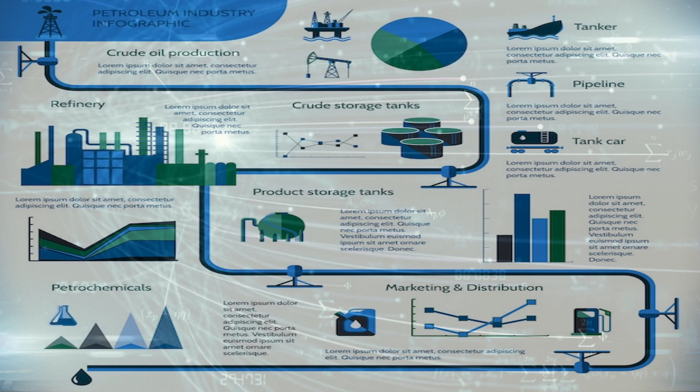The image shows the chain of petroleum products. This video discusses use cases of the Kalman filter at the top of the chain, crude oil and gas production.

Rudolf, Rudy, Emil Kalman was a Hungarian-born American electrical engineer, mathematician, and inventor. Rudolf Kalman was born in Budapest in 1930. After emigrating to the United States in 1943, he earned his bachelor's degree in 1953 and his master's degree in 1954, both from the Massachusetts Institute of Technology. Kalman completed his doctorate in 1957 at Columbia University in New York City.

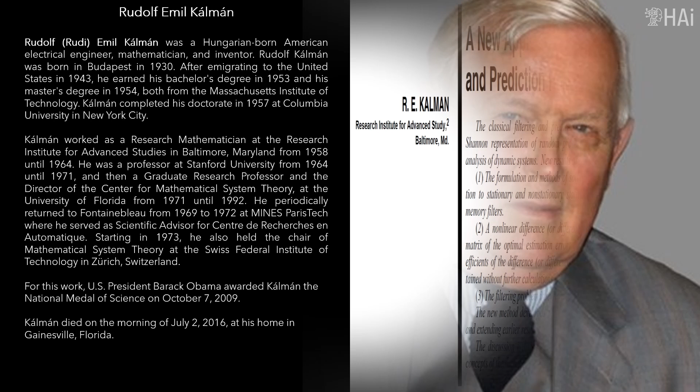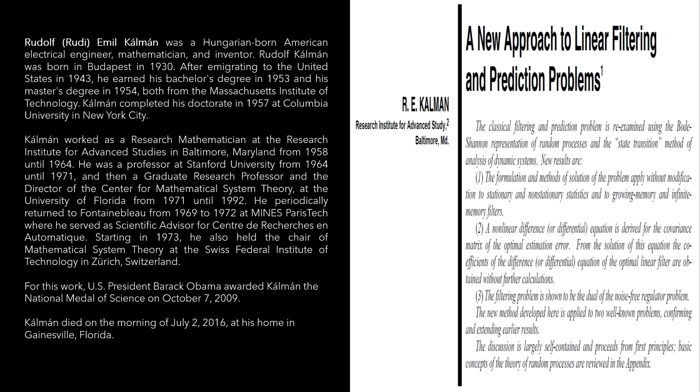Kalman was most noted for his co-invention and development of the Kalman filter, a mathematical algorithm that is widely used in signal processing, control systems, and guidance, navigation and control. For this work, U.S. President Barack Obama awarded Kalman the National Medal of Science on October 7, 2009.

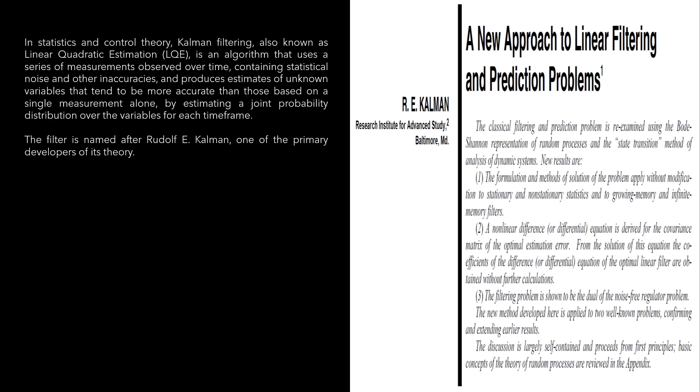In statistics and control theory, Kalman filtering, also known as linear quadratic estimation, is an algorithm that uses a series of measurements observed over time, containing statistical noise and other inaccuracies, and produces estimates of unknown variables that tend to be more accurate than those based on a single measurement alone, by estimating a joint probability distribution over the variables for each time frame.

Kalman filter applications in oil and gas production. Case: oil gas lifted wells. This section is based on the paper State Estimation of Gas Lifted Oil Well Using Nonlinear Filters.

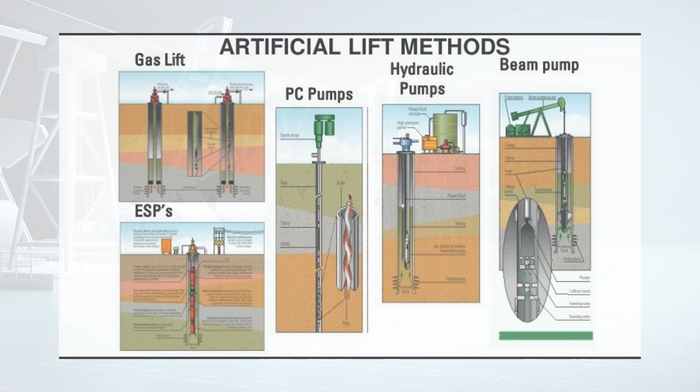The artificial lift methods are beam pump, hydraulic pump, PC pump, gas lift, and ESPs. Gas-lifted systems are usually situated in harsh environments, or deep below the sea surface, making it difficult for sensors to produce reliable measurements. This is due to the difficulty encountered when deploying the sensors in the location required to provide good measurement, excess heat effect on the sensors, and reaction between the sensors and the harsh environments, among other reasons.

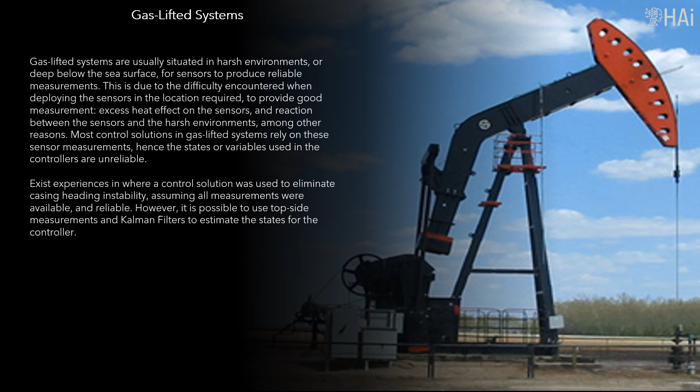Most control solutions in gas-lifted systems rely on these sensor measurements, hence the states or variables used in the controllers are unreliable. There exist experiences where a control solution was used to eliminate casing heading instability, assuming all measurements were available and reliable. However, it is possible to use topside measurements and the Kalman filter to estimate the states for the controller. The performance of the state estimation methodologies on gas-lifted systems varies, due to the dependence of the model on the underlying assumptions used at the modeling stage, in addition to the noise probabilistic hypothesis.

In the linear case, the Kalman filter is the optimal estimation method. But a gas-lifted system is inherently nonlinear, and nonlinear filters such as the extended Kalman filter (EKF), unscented Kalman filter (UKF), or particle filter (PF), among other nonlinear state estimation methods, should be used. The article presents the application of EKF, UKF, and PF to gas-lifted systems, and examines their performance by analyzing the residuals and performing hypothesis tests on the residuals.

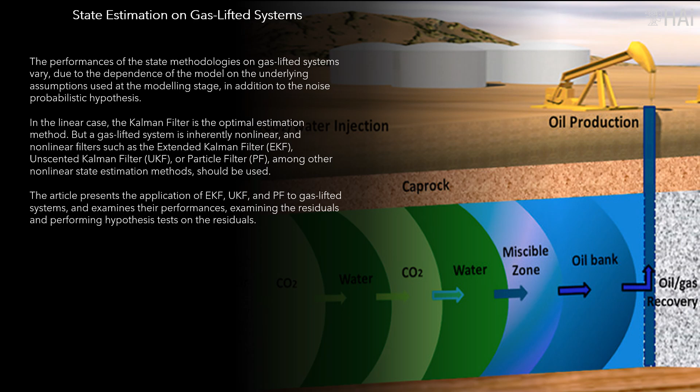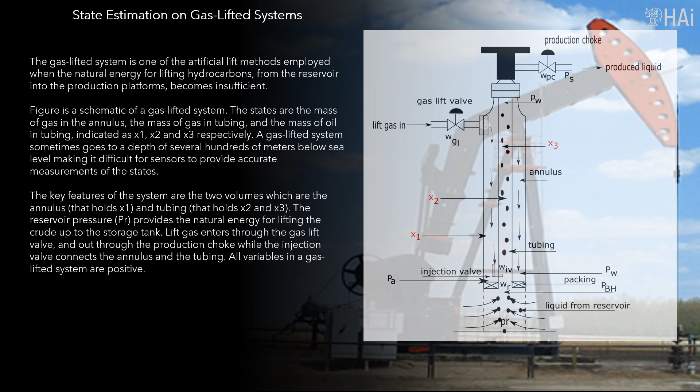The gas-lifted system is one of the artificial lift methods employed when the natural energy for lifting hydrocarbons from the reservoir into the production platforms becomes insufficient. The input is the percentage valve opening, which controls the flow rate of produced fluid through the production choke. In other cases, the flow rate of lift gas into the annulus is also considered as input, but here the authors fix it with a regulatory controller.

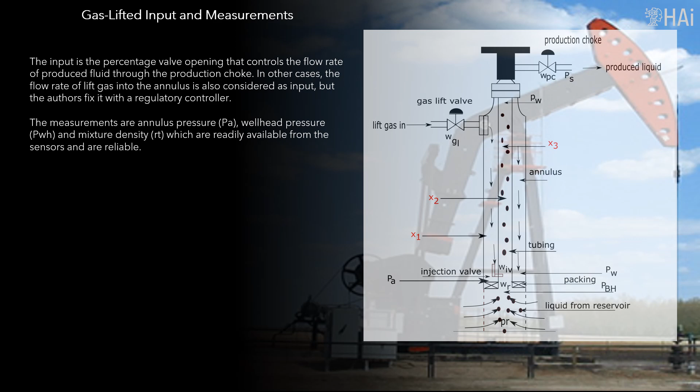The measurements are annulus pressure (PA), wellhead pressure (PWH), and mixture density (RT), which are readily available from the sensors and are reliable. The figure is a schematic of a gas-lifted system.

The states are the mass of gas in the annulus, the mass of gas in tubing, and the mass of oil in tubing, indicated as X1, X2, and X3 respectively. A gas-lifted system sometimes goes to a depth of several hundreds of meters below sea level, making it difficult for sensors to provide accurate measurements of the states.

The key features of the system are the two volumes, which are the annulus, that holds X1, and tubing, that holds X2 and X3. The reservoir pressure, PR, provides the natural energy for lifting the crude up to the storage tank.

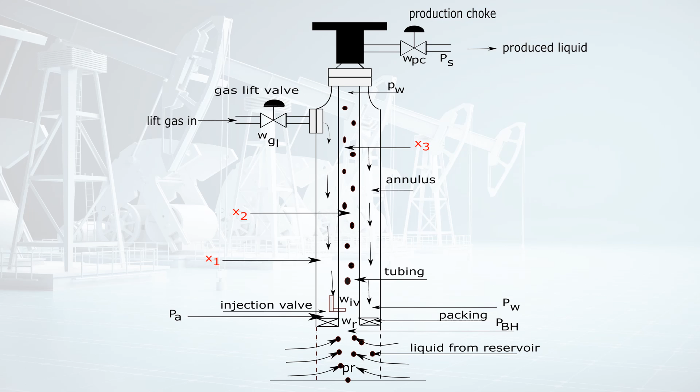Lift gas enters through the gas lift valve, and out through the production choke, while the injection valve connects the annulus and the tubing. All variables in a gas-lifted system are positive.

The gas-lifted Kalman model focuses on the formulation of the equation of state variables, which is summarized in a system of differential equations that explains the dynamic evolution of the system.

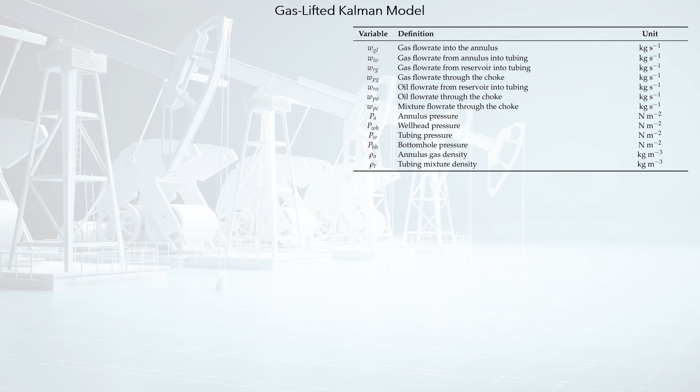The table shows the state variables included in the model, for each of which the modeler must formulate an equation. All of them are considered random variables, which must be characterized probabilistically, starting from the first two moments of their multivariate distribution function. The equations include the algebraic formulation, and the parameters of that formulation.

The uncertainty in the state variables derives from these two aspects. The equations that represent the dynamics may be imperfect, and/or the parameters included in the equations can be known imperfectly, making them random variables.

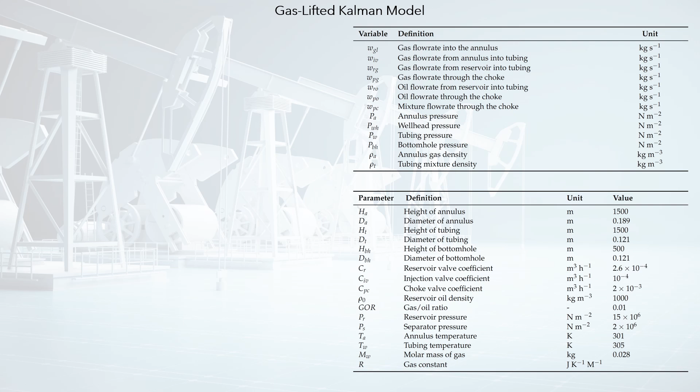The modeler must decide whether the parameters will be handled as deterministic, or if they will be handled as random variables, and therefore included in the process of state estimation. The table shows the parameters included in the gas-lifted Kalman model.

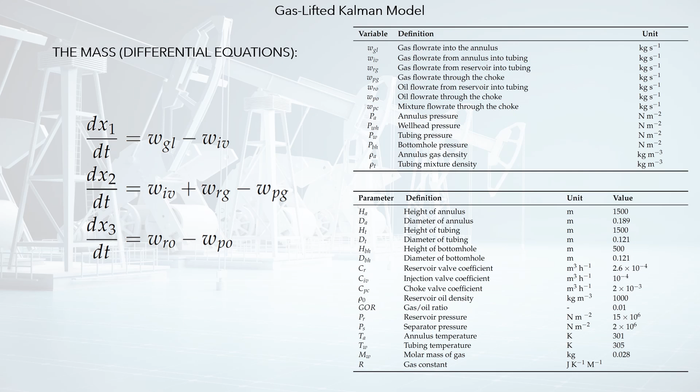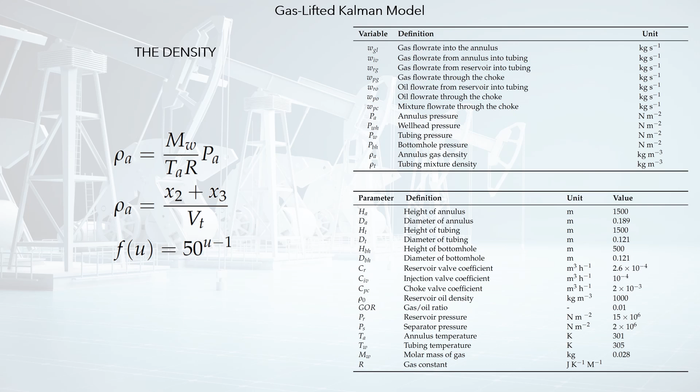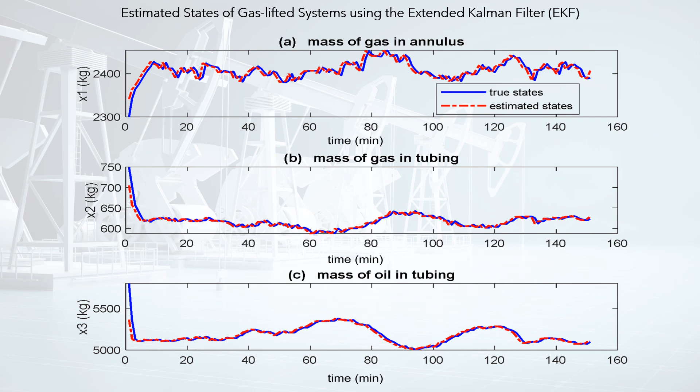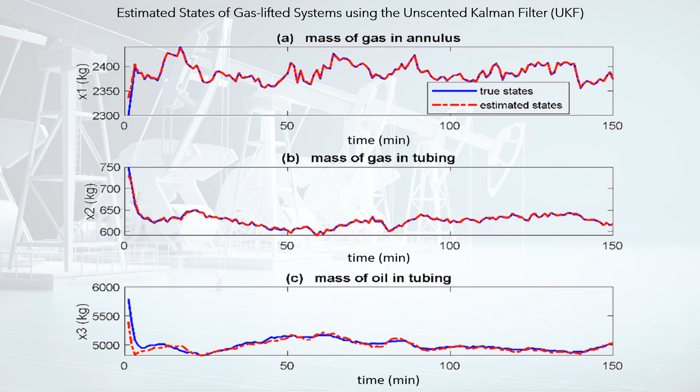True and estimated states of gas-lifted systems using the unscented Kalman filter, UKF. The estimated states converge at different times, with X2 being the fastest, and X3 slowest.

Standardized errors are obtained by dividing each error by the corresponding steady-state value.

Case: modeling oil and gas flows in well fields. This section is based on the paper Modeling Fluid Flows in Oil Fields Using the Kalman Filter.

The paper presents a statistical model of the relationship between injection and production wells on an oil field. The model is based on the analysis of the fluid flows that occur in the oil field. Its modeling is oriented to a Kalman filter model.

In this case, there is no direct physical model based on differential equations. Therefore, the modeler must create an algebraic model, which serves as the basis for an equivalent probabilistic model, whose parameters can be estimated through the Kalman filter.

In oilfield development, the reservoir flooding method is widely used. Water is pumped into a reservoir through injection wells, which displace the oil from the reservoir, thus increasing oil production in the producing wells. However, the complex internal structure of the reservoirs, and the configuration and position in space, complicate the process of constructing an accurate mathematical model.

Currently, there are several models that describe fluid flow processes in a reservoir. Some are based on differential fluid flow equations, filtration models, that adequately describe the internal structure of a reservoir, but the effectiveness of the model is only achieved with a high cost of calculation, and Kalman filter provides stochastic models that produce satisfactory approximations, with lower computational costs.

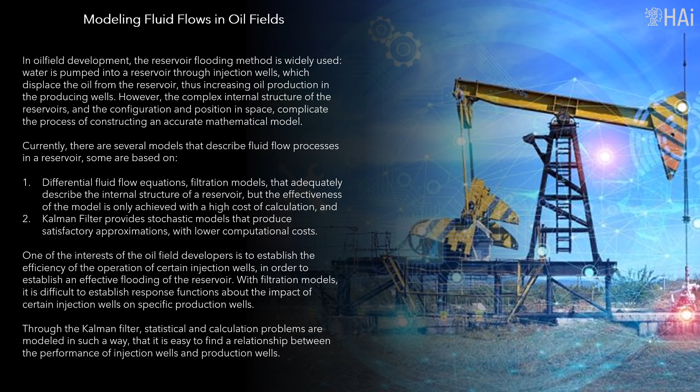One of the interests of the oilfield developers is to establish the efficiency of the operation of certain injection wells, to establish an effective flooding of the reservoir. With filtration models, it is difficult to establish response functions about the impact of certain injection wells on specific production wells. Through the Kalman filter, statistical and calculation problems are modeled in such a way that it is easy to find a relationship between the performance of injection wells and production wells.

Statement of the problem. We denote the sets of production and injection wells by L and M, respectively, then Q, equal to L united with M, is the set of all wells, for which their perforation Cartesian coordinates xm, including depth of the perforation, are known.

For each production well, the production history of oil VZMT, and water VWMT, is known, where the T index indicates the periods in which the operations were carried out. In addition, the duration of well operation, PMT, is known. If the well is idle at time t, these values are equal to 0. The production history is divided into production history averaged over the months, and number of hours of operation per month.

Modeling the processes that occur in a reservoir according to the accepted approach in filtration theory, we divide the reservoir into sufficiently small fragments and construct their dynamics. The division of a reservoir is represented in the form of a graph.

Each vertex in the graph corresponds to a certain domain of equal size within the reservoir. We assign to each vertex the amount of fluid in the domain, oil and water. The edges of the graph correspond to the flows of water and oil in the reservoir.

N is the ordered set of vertices, and ne(n) is the set of neighboring vertices for the nth vertex. Let xn be the coordinates of the nth vertex in the coordinate system D, and D a metric in the set D.

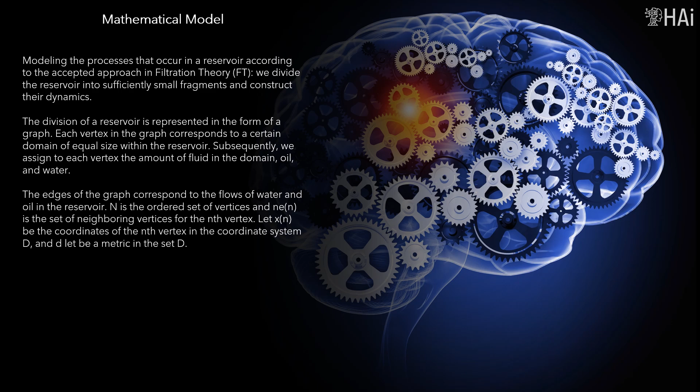The graph, with vertices indicated by circles, has hexagonal environments in the coordinate plane, associated with the geographical coordinates of the wells.

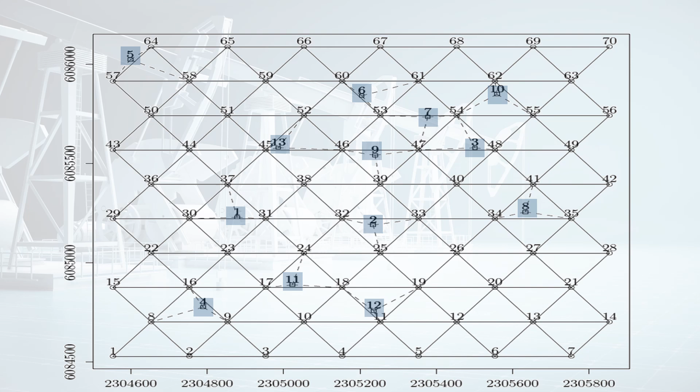Production wells are indicated by squares. Numbers mean the indices of the vertices of the graph, and the indices of the wells. The edges of the graph are marked with solid lines. The dotted lines indicate the set SOM, that describes the topology of the network.

The edges of the graph correspond to the flows of water and oil in the reservoir. N is the ordered set of vertices, and ne(n) is the set of neighboring vertices for the nth vertex. Let xn be the coordinates of the nth vertex in the coordinate system D, and D be a metric in the set D.

Let SOM be the set of the vertices closest to M with respect to the metric D. For SOM, the magnitudes of the influence of the vertices are defined in equation 1. This definition guarantees that the summation on n of the weighting factor QMN is equal to 1. For a vertex n, HWNT represents the amount of water at time t, and HZNT the amount of oil.

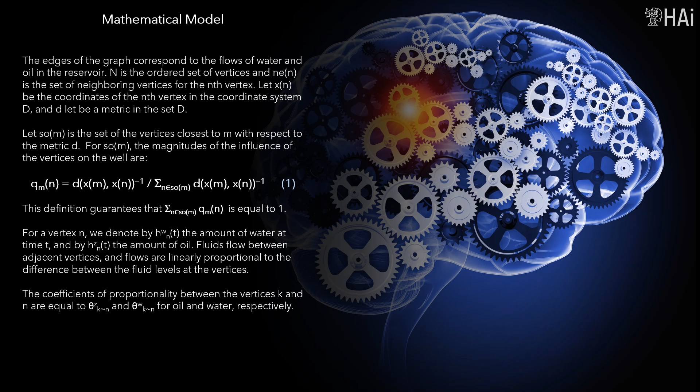Fluid flows between adjacent vertices are linearly proportional to the difference between the fluid levels at the vertices. The coefficients of proportionality between vertices K and N are equal to theta Z k n, and theta W k n, for oil and water, respectively.

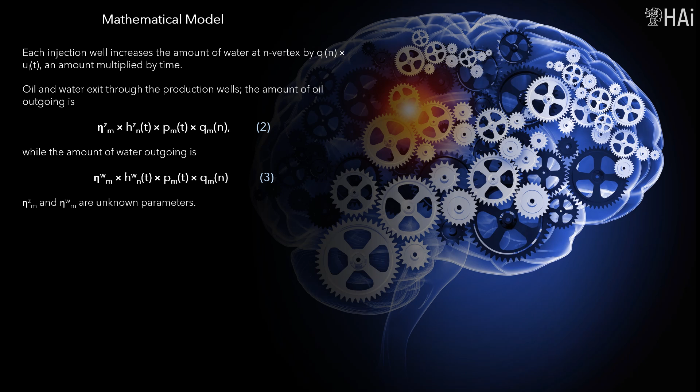Each injection well increases the amount of water at vertex N by QLN times ULT, an amount multiplied by time. Oil and water exit through the production wells. The amount of oil outgoing is presented in equation 2, while the amount of water outgoing is presented in equation 3. Eta Zm and eta Wm are unknown parameters.

Given the uncertainty in the parameters, for each vertex the white noise epsilon r,t, where r equals z for oil, or w for water, assumes a normal distribution with mean 0 and unknown variance sigma r, h squared.

Additional information SMT may be included in the state equation for fluids exiting the N vertex. Equation 4 defines the amount of oil in tons, and equation 5 the amount of water in tons. xi Zm and xi Wm are unknown parameters.

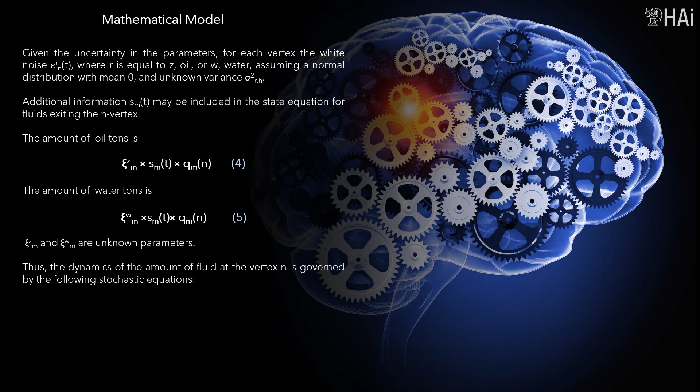Thus, the dynamics of the amount of fluid at the vertex N is governed by the following stochastic equations. Introducing equation 6, where N1 through Nn is a certain order on the set N, allows the stochastic equations to be represented by equation 7.

Where epsilon t is the white noise vector, a t the matrix that depends on unknown parameters, and c t some known vector.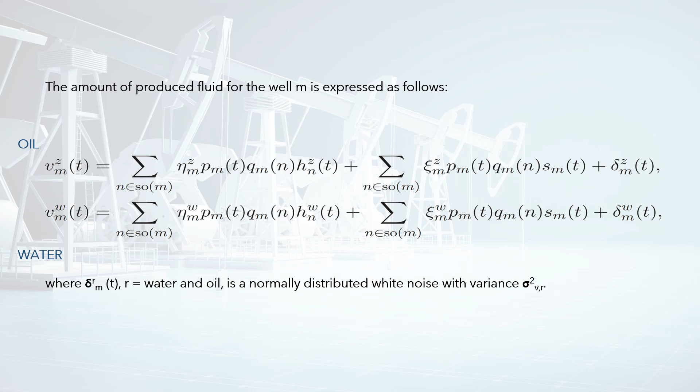Thus, the produced fluid for well M is expressed as follows: VZMT, the definition for oil fluid, and VWMT, the definition for water. Where delta Rm,T, with R equal to water or oil, is a normally distributed white noise with variance sigma squared V, R.

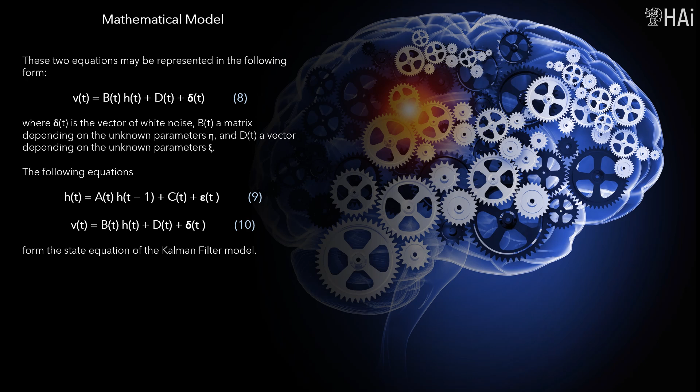These two equations may be represented using equation 8, where delta T is the vector of white noise, Bt a matrix depending on the unknown parameters eta, and dt a vector depending on the unknown parameters. Equations 9 and 10 define the equation of state of the Kalman filter model. From the estimates of the parameters theta and eta, the impact of injection wells on production wells is estimated.

Let W(N1,N2) be the set of all paths joining vertices N1 and N2 with a minimum length. We define the value of the influence of the injection well L on the production well M through the response function Ym,L, where the routing of oil and water is performed over all edges involved in the path Y belonging to W(N1,N2). The response function is defined by equation 11.

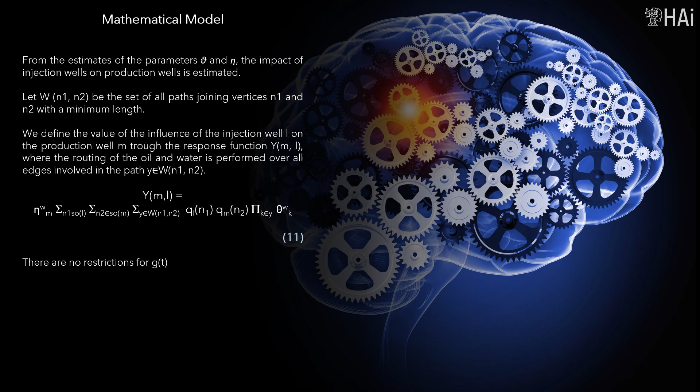There are no restrictions for GT. The process of implementing the model can be consulted in detail in the paper, Modeling fluid flows in oil fields using the Kalman filter.

The model was applied to a field with 13 production wells, 5 injection wells, with a history of 533 months of production. Injection wells start operating after 300 months.

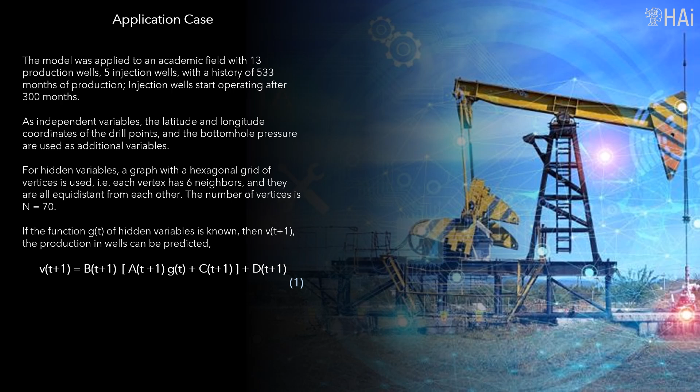As independent variables, the latitude and longitude coordinates of the drill points, and the bottom hole pressure, are used as additional variables. If the function gt of hidden variables is known, then Vt plus 1, the production in wells, can be predicted using equation 1.

For hidden variables, a graph with a hexagonal grid of vertices is used, i.e. each vertex has 6 neighbors, and they are all equidistant from each other. The number of vertices is n equals 70.

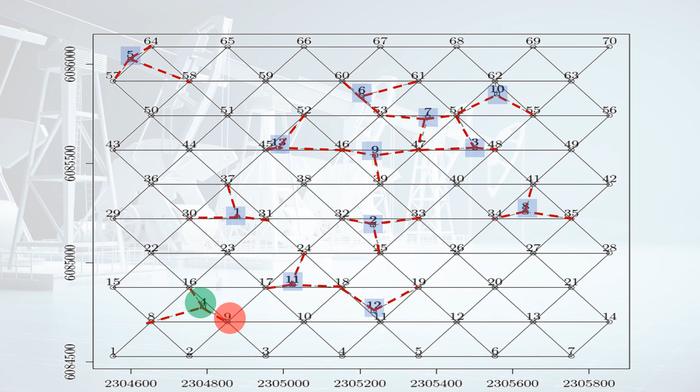The next figure shows the production at the well with index 4, green, and one of the sources, well 9, red. The first graphic shows the production of oil and water in well 4, and the second, the production of oil and water in well 9. If the GT function is known, using this model, production in wells can be predicted.

The figure shows the forecast of oil production for the year ahead, 12 months, at well 4. The vertical dashed line shows the beginning of the forecast period, in which the actual production Vt was unknown.

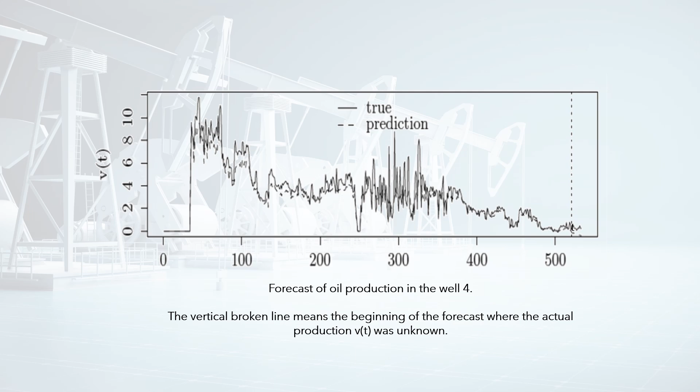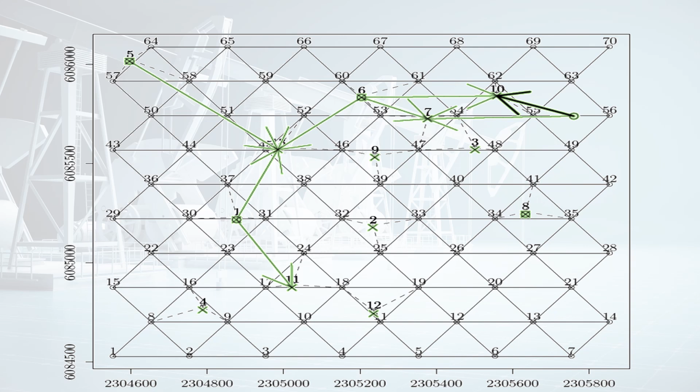The figure shows that a fraction of water will flow from the injection well to a production well, and that all water flow will be distributed through the network of production wells. The image presents the flow in the reservoir in detail.

The real goal of having a reservoir model is to be able to perform water injection operations, to optimize the management of the well field.

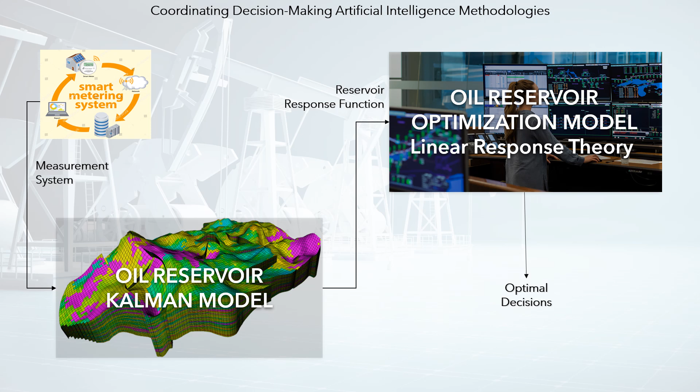The methodology involves linking predictive and prescriptive artificial intelligence. In this case, the predictive model is based on the Kalman filter, and the optimization model is based on the linear response theory. The linear response theory is synthesized by means of the reservoir response matrix, which relates QA, the rate of injection or extraction of gas and/or water, and QB, the rate of oil extraction, with the change in pressure SI at the selected control points.

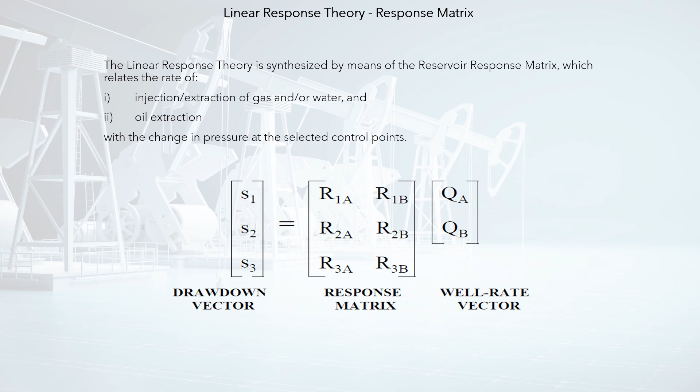The example considers I equal to 1, 2, or 3. The response matrix must be estimated by conducting experiments with the simulation model, and is the link between the two models.

Optimization knowledge expert systems: the current computing power makes it possible to design complex optimization processes, in which information is exchanged autonomously between models. One of these concepts is the artificial hippocampus, which corresponds to the vision of expert systems, traditional in artificial intelligence.

For cases of high dimensionality, for example oil fields with many wells, or oil field design processes with many possibilities, the production of the elements of the response matrix can be accelerated, considering the availability of CPU processors, which an oil company currently has.

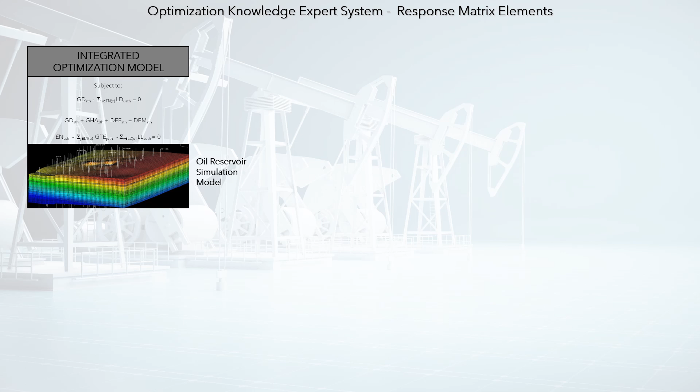The basic idea is to think about including the simulation model within the optimization model. This is a viable idea, but it involves high complexity in mathematical formulation, and high computation times.

The production of the elements of the response matrix may be a standalone process; therefore, they can be generated outside the optimization process, and may be stored in an optimization knowledge database. The simulation model could be the Kalman filter model of the reservoir.

The elements of the response matrix will be used by the coordinated optimization model, when the optimization process requires this information. If large-scale optimization methodologies are used, it is possible to establish a dialogue between the information system and the optimization model, as the optimization process progresses, decreasing the dimensionality of mathematical problems and speeding up solution times.

It should not be forgotten that cases in the real world are complex and of high dimensionality. For example, it is quite possible that it will be necessary to coordinate simulation models of multiple reservoirs.

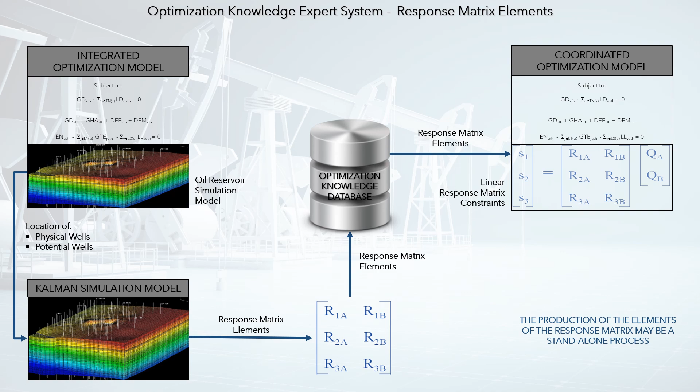Like Herbert Simon, Hypothalamus artificial intelligence believes that computer-based mathematical modeling is the greatest invention of all time. Thank you for your attention.